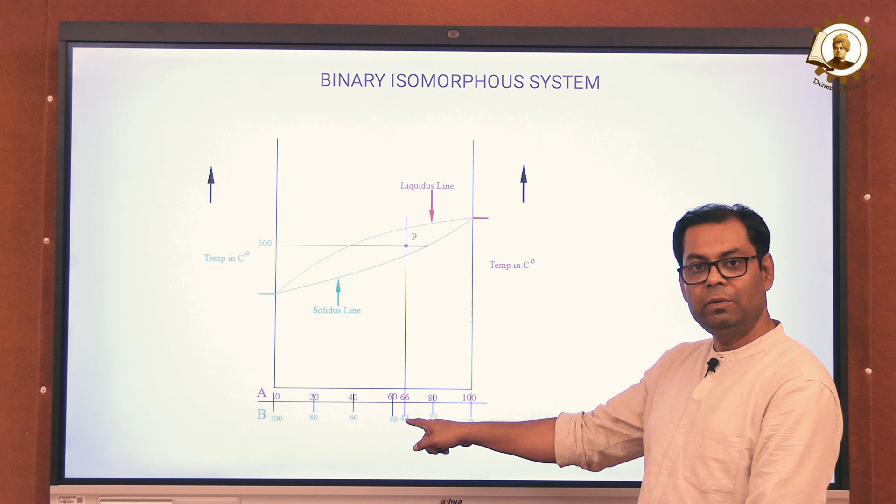Clear? Maybe we consider it is at 500 degrees centigrade right now. Now we have to find out the relative percentage of component A and component B at point P at that instant. So component B has 44% and A has 66% over here. In that way we can find it out.

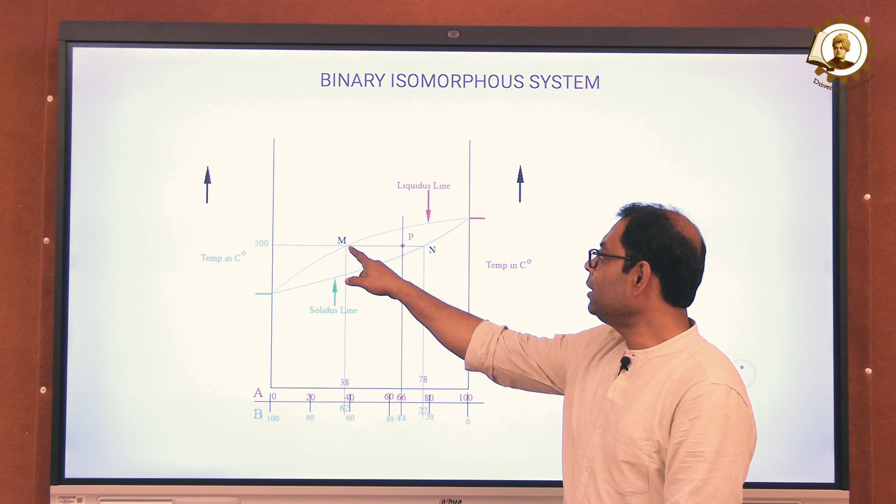Next, we are going to spot point M and point N on this diagram. So MP is one region and PN is another region. Important to note that MP is connected to the liquidus line, and NP is connected to the solidus line. On the solidus line, the relative percentage of A and B is given as 78 and 22, and for point M, the relative percentage of A and B is 38 and 62, also given in this diagram.

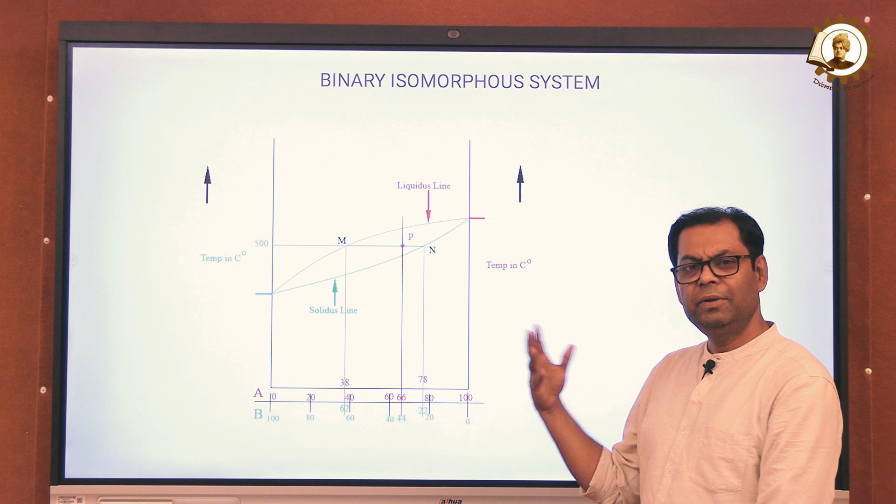It is not arbitrarily done. You have to put it on the graph sheet, and from the graph sheet take the real data. It's not difficult, it is very easy. Now, how to find the amount of solid? The amount of solid we can find with respect to the liquidus line. That means MP divided by the entire length of the line, MN, multiplied by 100. So it is the lever arm principle or lever rule.

Why is it called the lever rule? Because if point P is the pivot point and MP and PN are the two sides, then to find the solid portion, we take the portion directly connected to pure liquid, and to find the amount of liquid, we consider the portion connected to pure solid. That means just the opposite cases.

So, for example, with respect to A only, I get the value MP by MN into 100, where MN equals MP plus PN. Now what is the length of MP? That is nothing but 66 minus 38. 66 is the amount of component A, and 38 is the relative amount of component A at point M. So we put this value, multiply by 100, and get the amount of solid as 70%.

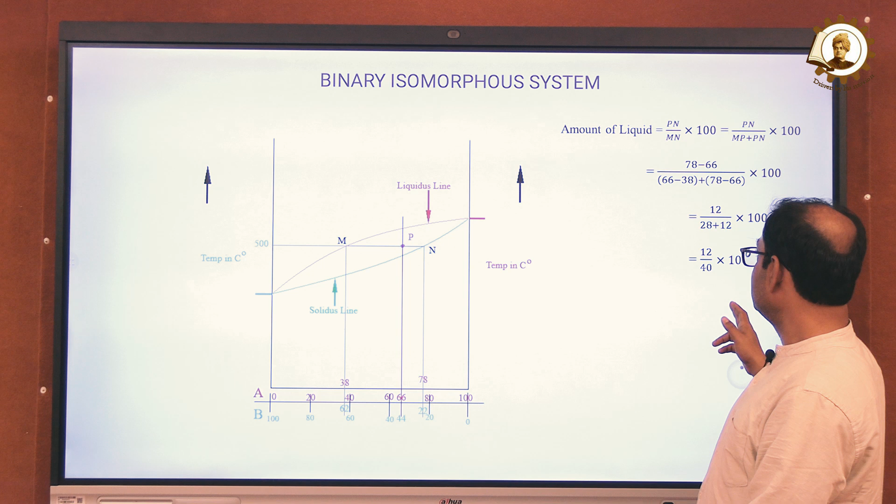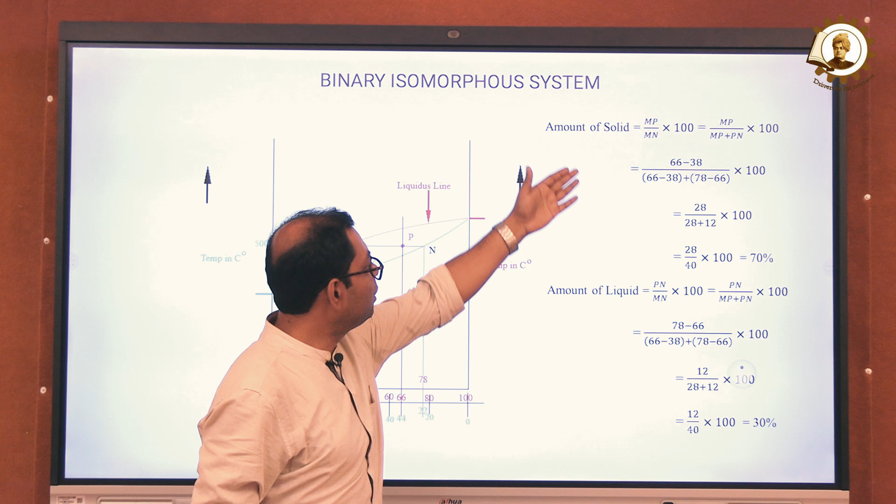Similarly, to find the amount of liquid, it will be PN divided by MN. PN is directly connected to the solidus line, the pure solid portion. So we can find it by this formula, called the lever arm principle, and we get the value as 30%. Together, these two values give the amount of solid and amount of liquid. You can take a snapshot and use this formula.

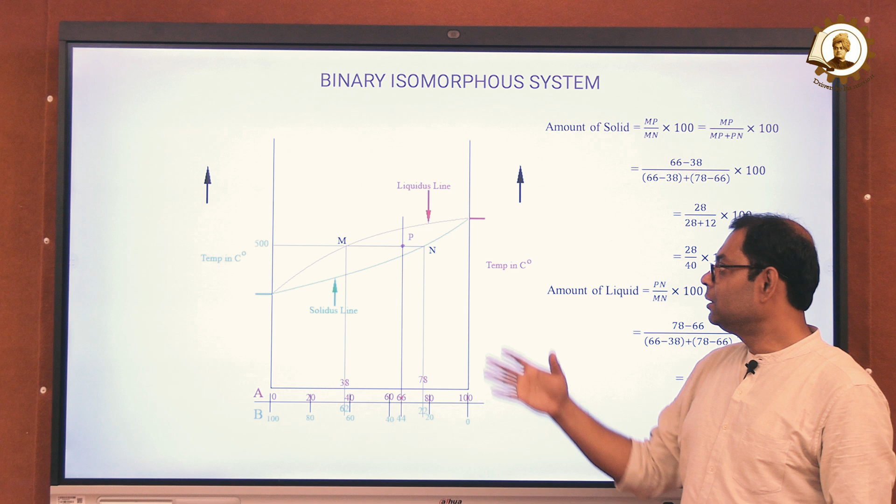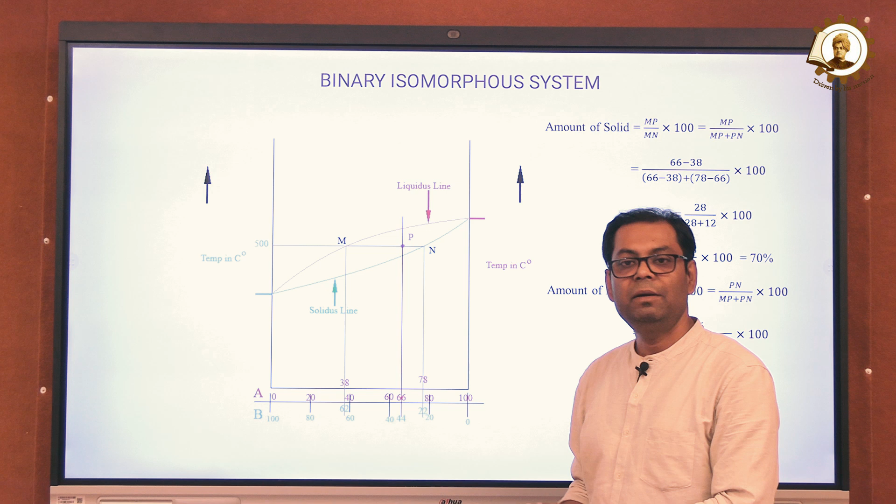So this is how, using the lever arm principle, you draw the solidus line and liquidus line, find the relative percentage of components A and B at point P, the correct temperature, and locate M and N properly. Using a normal graph sheet, you can predict the amount of solid and amount of liquid in that particular composition of A and B. So this is how it is done. Simple, isn't it? Thank you very much.